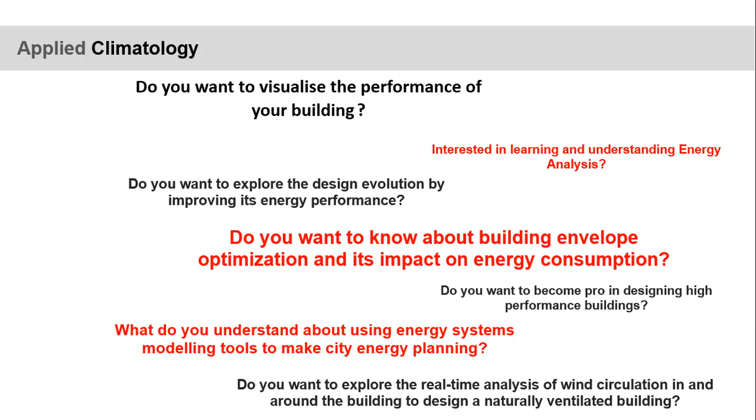So, as per my understanding, when I got an invite for this, I just wanted to understand what will be the objective of the lecture. The objective of this entire lecture is to understand the need of the industry and to upgrade yourself. It's not a theoretical lecture where we'll be talking about what is CDD, HDD, what is the azimuth angle, how the sun rotates, or from which direction we are getting the sunlight. We all know about that.

The idea is, based on your understanding of climatology, what you can do in the industry. I am an architect, from the architecture background, and I suppose most of you are from that background. It's not limited to conventional architecture these days. We are evolving more, trying to understand the design aesthetic and performance aesthetic and compare both. We are trying to catalyze our informed decision making, and to understand how the integrative design process will work. And we need to understand the market demand for all the analytical methods that design professionals are using.

So basically, the objective of this lecture is to prepare you to understand the need of the market, and to become a pro version of yourself by taking some kind of courses. At the end of the session, I might be telling you about a few of the courses and tools that we are using in the industry, that will help you develop professionally and learn and evolve more in this profession.

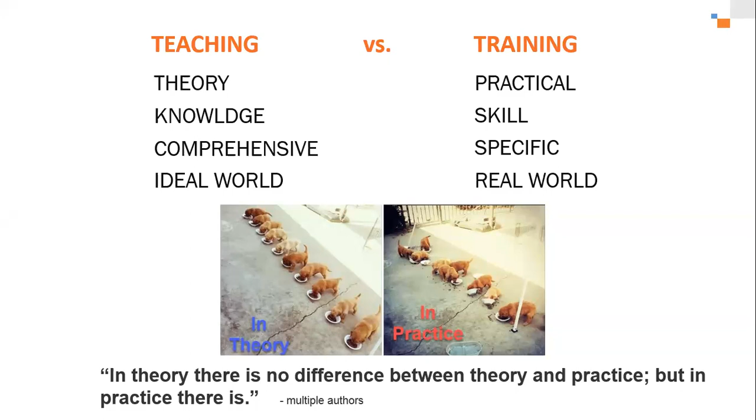When I was a student, I used to make different kinds of arrows. My teachers used to ask me how the wind flows, and I used to make colorful arrows, blue, red, cool wind, hot wind, warm wind. But in actual design it doesn't work that way. So that is the understanding that we need to gain to upgrade ourselves in this industry.

So what is our journey of upgrading ourselves? In brief, from basic, you need to develop a smart tool understanding and become a pro version of yourself. We all have smartphones, and we keep upgrading them with different versions of the operating system. If there is iOS 14, then iOS 14.1 will come, 15.1 will come, iOS 16 will come, 16.1 will come. So we need to keep upgrading ourselves based on the market need and demand.

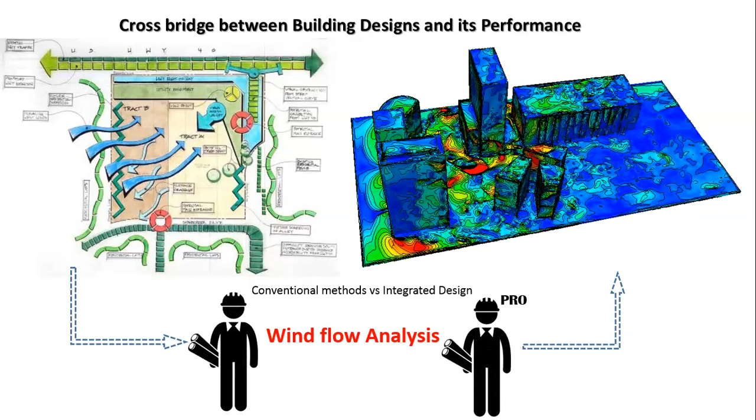of the daylighting, etc. Similarly, for the wind flow analysis, as I've said, we have designed everything with a very beautiful master plan and all, but in reality we have to quantify where we are getting the negative pressure, positive pressure, and how we are orienting our building in terms of wind direction and the intensity of the wind, and where we can get more advantage of the natural ventilation inside the building.

Heat gain analysis: as we have seen, we used to design a building in a way that, okay, the sun will be at this angle, then it will be at this angle, and this is how much sunlight we are getting. But actually, how we are going to understand how much the heat gain is, is where we need to upgrade ourselves and learn more tools to understand the impact of heat gain and to quantify it basically.

So with this, I'm going to start my session. The previous few slides were just to give you the hang of what this lecture is going to be. And now with this, I'm going to start with the understanding of today's topic.

So starting with climate change, we all know climate change is a popularly used term now, and nowadays it is impacting all the industries that I have quoted here, whether it is agriculture, forestry, fishing, healthcare, governmental services, everywhere. We all know there is climate change and it is impacting us a lot. And what is the cause of climate change? All these greenhouse gases which we are emitting in the environment, and that is causing the climate change effect.

Can anyone tell me in the chat box, maybe Nishta, if you can tell me who has given the right answer, which greenhouse gas is the major stakeholder contributing to climate change? We have so many gases here: methane, carbon dioxide, carbon monoxide, nitrogen oxide, and all. Can anyone tell me which gas is the major stakeholder contributing to climate change? Any answers?

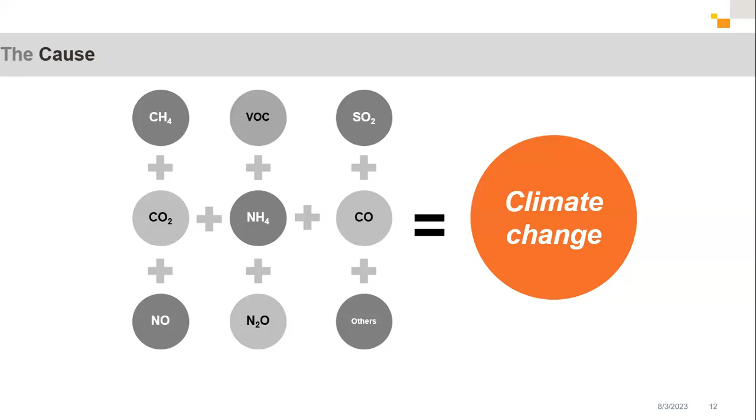Very good. Yes, CO2. So why CO2? Because out of all the greenhouse gases, CO2 is the major stakeholder because it remains for a longer time in the environment and its phase-out time is very long. So because it is there very long and is the major contributor, we need to understand how to limit our emission of carbon dioxide in the environment, not to reduce it, but to mitigate the impact of climate change.

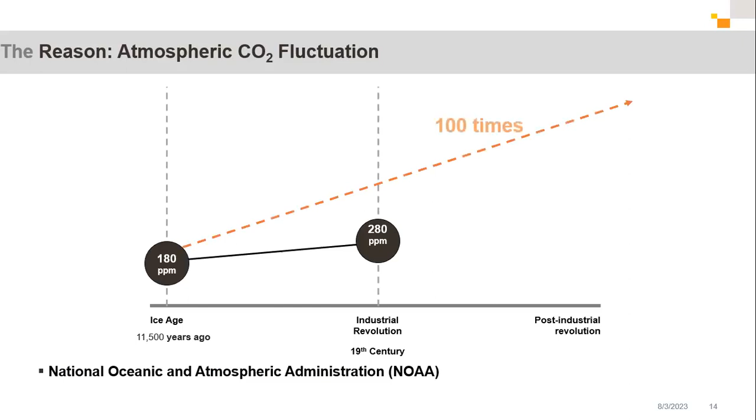So if you see how the atmospheric CO2 fluctuation was, from the ice age till the 19th century, we have the fluctuation of CO2 from 180 ppm to 280 ppm. Okay, but in the current post-industrial revolution, the fluctuation has increased so much, from 1.5 times of carbon dioxide emission to almost 100 times. The projection is like that.

So we understand why we need to mitigate the impact of CO2 and how to reduce the CO2 emission in the environment: because we are contributing a lot of emission of carbon dioxide in the environment, and that is causing a real problem for us, and it is going to cause a real problem for our future generations as well.

So what is the global warming effect? We all know this. In a very simple term, when we have the radiation coming through and it is getting reflected back, it is the normal concentration. But if it gets trapped inside the Earth's environment, then the concentration becomes high, and then it causes the warming effect.

And why does it become trapped? Because all these greenhouse gases form a layer which does not allow the radiation to dissipate back into the universe. So basically, because of that, this entire radiation is getting trapped, and we are getting higher atmospheric concentrations, which is actually warming the environment.

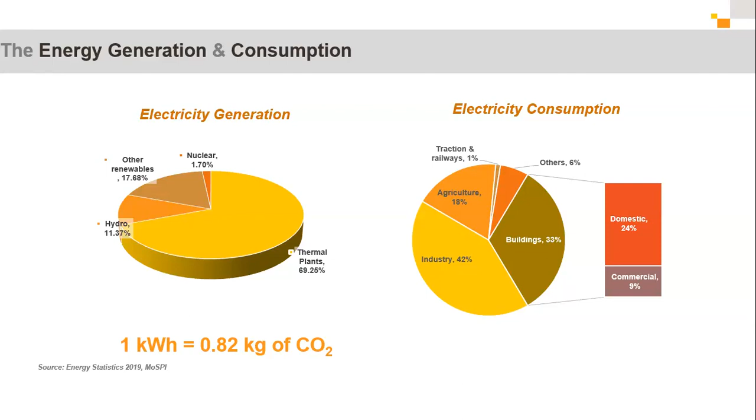So we all know that the building sector consumes more electricity, and by 2060 we are going to build twice the building stock; that is what is yet to come. And with the current rapid growth and current construction trends, if we are building and constructing inefficient or carbon intensive buildings, then it is going to be a huge problem for us in future.

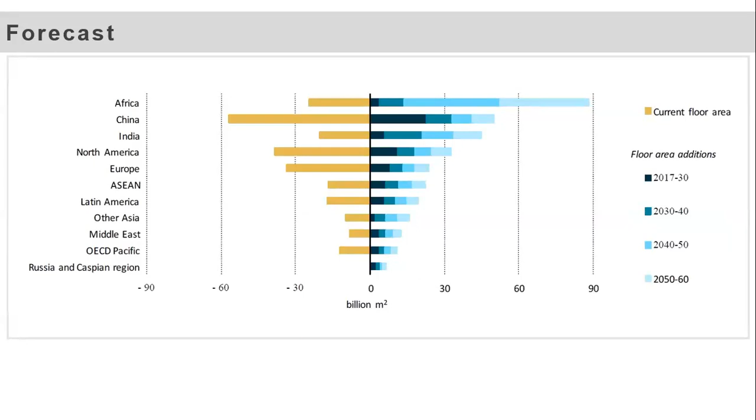So what we need to understand is, if you see India's floor area addition, in just a few more years we will be doubling the construction industry. So we need to understand where we need to pitch in, how we need to design our current and future building stock, and how to improve our existing building stock to mitigate climate change and the negative impact on the environment.

So the need of the hour is, we need to seek, improve, and alter, even disrupt. We love to design and redesign. I have quoted here, the buzzwords today are innovation and disruption, and both are considered positive. But we need to ask ourselves: if we are not going to design in a conscious way, where will we find the resources to build new housing, and where will we find the energy to maintain it? And how can we design and redesign? Responsibility should be the question we brainstorm, and what should be the guiding principles.

So from here, I want to talk about what should be the underlying principle with which we can have a conscious or climate responsive design, where we can contribute more to the industry and make informed decisions. We are not just designing for the sake of designing. We need to design anything for a purpose, to meet a need, and the design of a particular building has to provide comfort and well-being to the occupants in a new or better way. So we need to achieve a goal and make a statement.

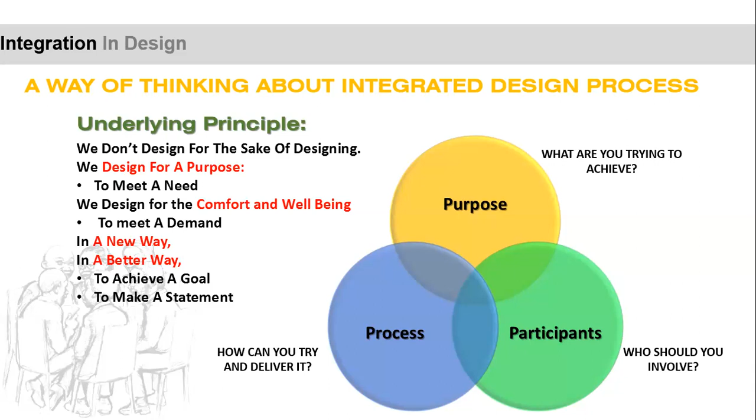We need to define the three P's in the integrated design process: purpose, participants, and process. And we need to ask ourselves: what are we trying to achieve? Who should be involved as participants or occupants, who will be the stakeholders, with whom will we be aligning, and how can we deliver it? For the process, we need to understand whether the whole construction process is efficient or not. And the way of thinking should be, if we cannot measure it, we cannot improve it.

So there's something we need to understand: how to quantify our design. If we have a good understanding of building physics and engineering sciences, then we'll be able to quantify it and do a quantitative analysis. And then we need to think creatively also, where our creative design process gets involved. So the conclusion of this background of design principles is that we have to have a mixture of science and art as an integrated design process to develop our designs and make all the design decisions. That's how we'll be able to take informed decisions for making any design.

Moving forward, as I've talked about purpose earlier, what is the purpose of the building? To provide occupant comfort, in terms of thermal comfort, air quality, visual comfort, and acoustic comfort. What are the physical processes that happen when we design a building, and what defines the comfort of the occupants? It's heat transfer, moisture transfer, light transfer, sound propagation, and so on.

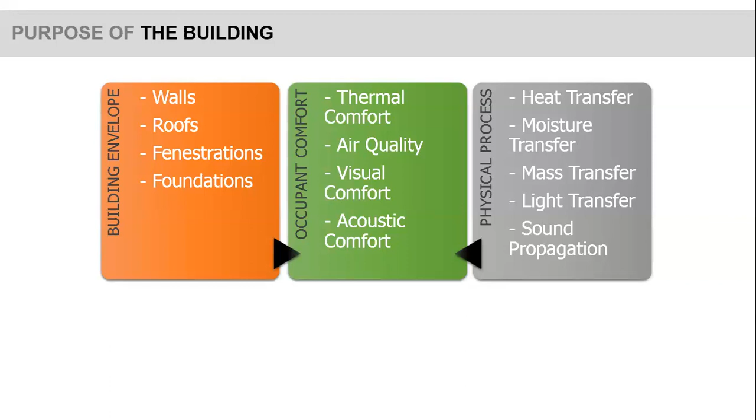We all know that thermal comfort and everything can actually be designed properly by optimizing the building envelope. When I say building envelope, we need to have a proper wall design, roof design, fenestration design, and foundation, so that we can achieve the required thermal comfort inside the building. The active systems involved to achieve thermal comfort are the HVAC system, artificial lighting, etc. Then understanding the energy consumption scenarios in the building.

Not going into much detail, I just wanted to show that we've already discussed that buildings contribute to 33% of electricity consumption. How is the distribution of energy consumption in any building? I'm taking a typical case of a commercial building.

If we see, 55% of the energy consumption goes into air conditioning, like heating and cooling the building and maintaining the proper thermal comfort requirement of the occupants. Then it takes 25% of the energy to design proper lighting, internal loads take 15%, and other loads take 5%. So we need to understand that if we're able to optimize the air conditioning and lighting loads in any particular building, it will be easy for us to reduce the electricity or energy consumption.

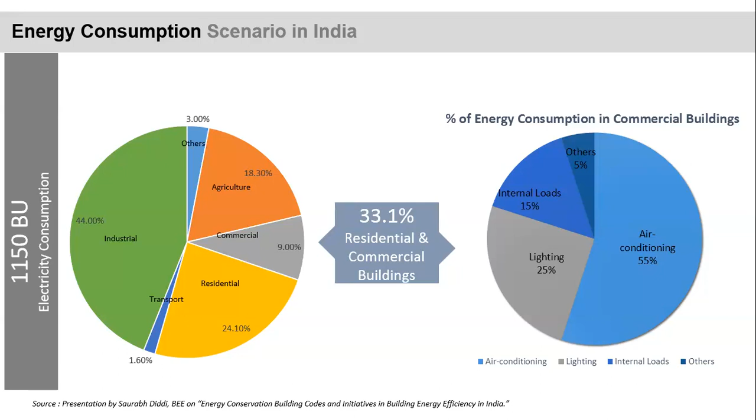This is indirectly translating into the reduction of CO2 emission in the environment.

Now, why is there a need for energy efficiency? I'll give a basic definition here. As mentioned in the Paris Agreement, we need to hold the increase in global average temperature to well below 2 degrees Celsius compared to pre-industrial levels, and pursue efforts to limit the temperature increase to 1.5 degrees Celsius above pre-industrial levels.

This is a question that comes up many times, and you might find it difficult to answer, because many people think that for building energy efficiency, you just need to install renewable sources of energy or solar panels. But that's not the case. We need to understand the process. It's not simply about switching our energy demand to renewable sources. We need to put more effort into designing and reducing the internal loads of the building, and then switching to cleaner sources of energy.

If we look at the life cycle of the building design process, these are the basic steps: preliminary design, design contract, detailed drawings, bidding process, then contract negotiation, and then the construction process.

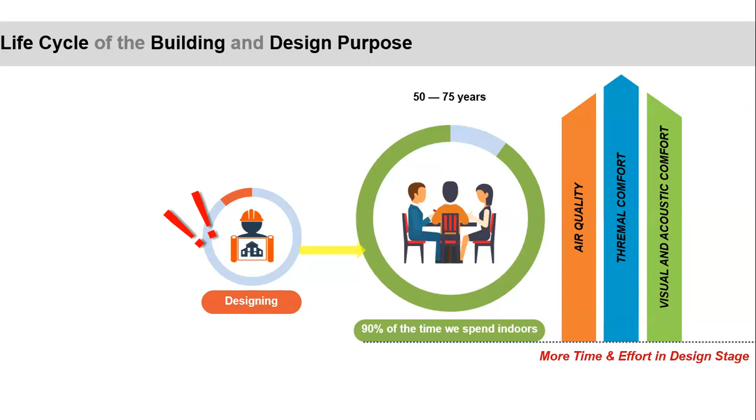We need to apply those theories here to improve these three parameters inside the building. And how will it happen?

In the initial stage, we need to understand the passive strategies, which are climate responsive in nature. We need to understand the surroundings of the building, the site-specific requirements, and what materials are available.

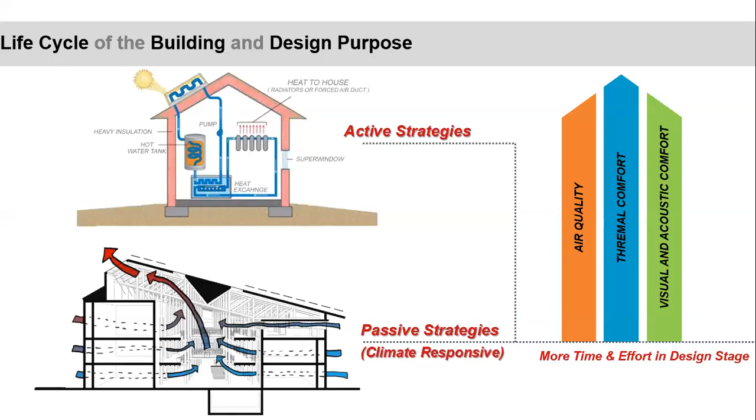After that, we need to apply the active strategies—how to make the building thermally comfortable, what mechanical and electrical systems to use, and so on. But it has to be a mixture of both, and we need to put a lot of effort into properly designing a building. Almost 50 to 55% of the time we need to spend, with an integrated process, to come up with the right design for the right situation or the specific requirement.

So the moral of this discussion is that during the design and construction stage, we put in human and material resources, which is called the capex, and then during the operation phase, we consume electricity.

If we optimize the human and material resources during the design and construction phase, the capex will increase, and the opex will be reduced. So that is the whole understanding—to balance the capex and the operational expenses properly.

Now, coming back to the previous question that everyone would have asked you: 'Just install the solar panel, then your building will be energy efficient or something like that.' But do you think that's the right process? I don't think so, because first we need to avoid the wastage.

If I try to reduce this entire pyramid into 3 steps: first we need to understand how to avoid wastage of resources and energy consumption. Then we need to save energy through efficient usage of fixtures or appliances, or through building design parameters. Then we need to shift to renewable sources of energy, because the more we move upward in the pyramid, the complexity and investment of the parameters increases.

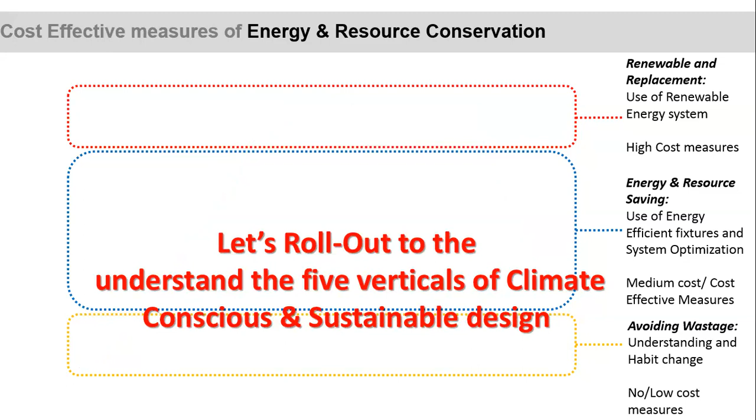So now, based on this, let's roll out to understand what are the main 5 verticals of climate conscious design, because we have understood the background of climate change, what is the need and where we are supposed to apply it. Now let's see what are the 5 design verticals to attain these design parameters.

This has to be at the conceptual design stage when the project is getting launched. The idea has to be seeded there, aligning all stakeholders relevant to the industry to add project value and credibility, and to address the global causes that will improve the sustainability of the building and help us design world changing buildings.

So the first vertical is learning from nature as systems. We all know about biomimicry designs, bioclimatic designs and all, but what exactly is it? It is learning from nature.

You might have seen that nature does nothing uselessly. And I have put another quote here: humans will never devise an invention more beautiful, more simple and more direct than nature does, because in her inventions nothing is lacking and nothing is superfluous.

When I say nothing is lacking and nothing is superfluous, what do I mean? With nature, and by understanding nature, we have understood the word called optimization. Optimization is neither lacking anything nor the superfluous use of anything, but the right amount and the right consumption. That's the word optimization, which we should learn from nature.

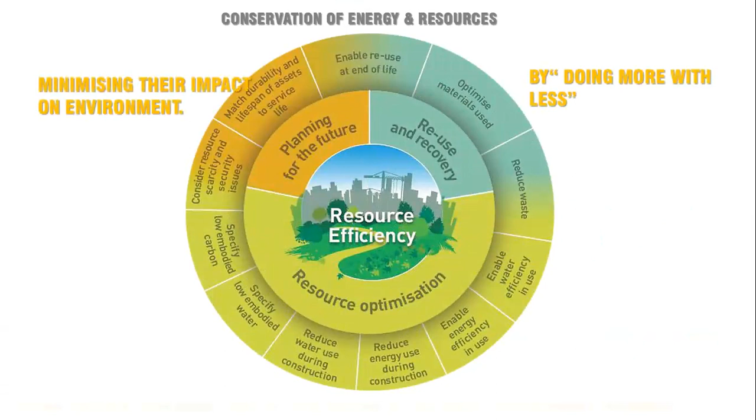So the three parameters of resource efficiency are: we need to plan for the future, minimizing the impact on environment; we need to reuse and recover by doing more with less; and then we are supposed to optimize the use of energy, material, waste, and water in the most sustainable manner.

Once you understand everything, once your principles and ideologies are clear in your mind, then you jump into the design process - how to make an integrated building design. What will be an integrated design approach, combining all your understanding and applying it at the various stages of design, and all these principles will help you make informed decisions, which is what is required.

Many times we design something in a flow of thoughts that comes during the design of any particular building, because we are all architects and we cannot restrict the design ideas coming into our mind. But we need to understand whether these ideas are leading towards the right direction, and that is where you need to take informed decisions based on how energy efficient and climate conscious your strategies are.

Choosing suitable materials as per the site specific requirement, decreasing dependency on non-renewable sources by orienting or designing a building in a way that gives proper lighting and proper thermal comfort inside the building, conserving and recycling the resources used inside the building.

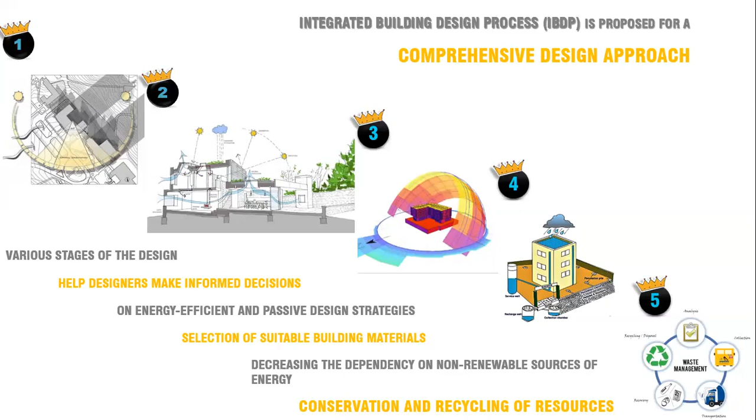So here I would like to tell you these are the different analyses that you can do on your design to understand the climate consciousness of it. At the site level, you can do the site analysis where you can understand the site topography.

You can do shadow analysis. You can understand the natural water resources. Then you can design to mitigate the urban heat island impact by doing the urban heat island assessment, by doing outdoor wind CFD models, which will help you in the wind flow directions and all.

At the climate analysis level, you can understand the sun path. You can do the sun path analysis, wind flow analysis inside the building, form and massing analysis of the building. Whether the design of the massing of the building will be compact, or we need to make it in a different staggered way. So you have to do these kind of analysis when you're designing the building. You need to also integrate the passive design features at the design stage itself.

Then coming to the building analysis level, you can do indoor CFD modeling, building envelope optimization, daylighting simulation, artificial lighting simulations, thermal comfort analysis, box modeling simulation, innovation designs, material consultation, etc. And then at the water assessment, you can do rainwater calculation, stormwater harvesting, recycling and reuse of water. And then for the waste management, you can understand the solid waste management and zero waste building design model.

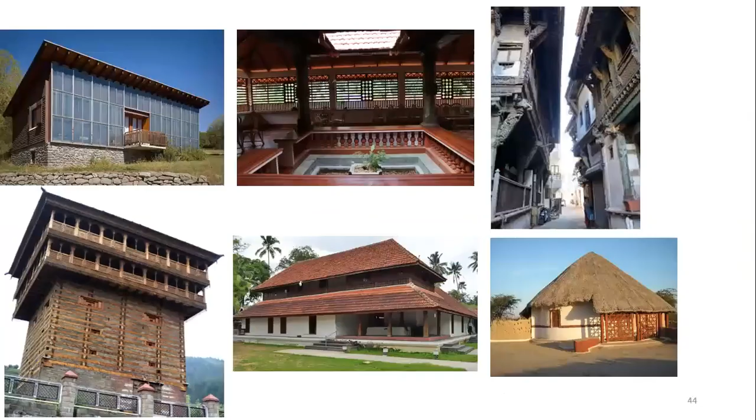Coming to the third vertical, we need to show respect for the place and people. And why I'm saying this, we need to understand the different typology of the houses. As you see here, in earlier days we used to make different types of designs. Like in cold climate, we have different design styles. In warm and humid climate, we have a different housing typology. In the composite climate, we have a different housing typology. In hot and dry climate, we have a different housing typology. But why did we used to do that?

Because we were earlier respecting our climate, we were giving more focus to the local environment, understanding the place and the culture of it. So if you see these examples, we are not building some different type of building in a cold climate where it is not required. So if you see all these kind of housing typologies that we used to build, which are actually required for the place-specific requirement, we as architects, currently what are we doing?

If you see buildings in Mumbai, if you see buildings in Gurgaon, both the cities have different climatic conditions, but they're having similar types of building designs. Do you think this is the right approach to design? No, because then what we are doing is creating a problem, and then trying to find a solution: okay, why is my building not performing well? Why is my electricity bill so high? Why am I so thermally uncomfortable inside the building? So this is the problem that we have created, and then we are trying to find a solution for it.

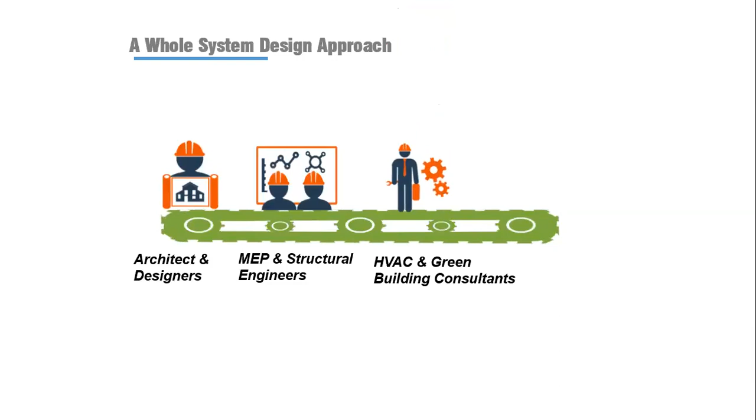We need to have a whole system design approach with an integrative design process. At the initial stage itself, we should have a design charrette, and at the concept design and schematic design stage, everything needs to be fixed, everything needs to be finalized. All the stakeholders should be aligned together. They should be sitting together and telling us, okay, these are the design requirements.

And if you remember the life cycle of the building slide that I've shown earlier, only then are we going to increase the 30% of time that we were spending earlier on the design stage to almost 50 to 60%, and will be able to improve the design performance, or the resource performance of the building. So design charrette is an important term that you might hear a lot in future, where all the stakeholders involved in the building design are together, sharing to understand the concept design and to finalize the concept design and schematic design of the building.

So now let me show you the energy efficiency canvas of the building. If you see, we have different aspects. We have policy for achieving building energy efficiency. And why am I talking about building energy efficiency? Because, as I've explained earlier, energy plays a major role. Consumption of energy results in a lot of carbon dioxide emission into the environment. So we need to focus more on mitigating that.

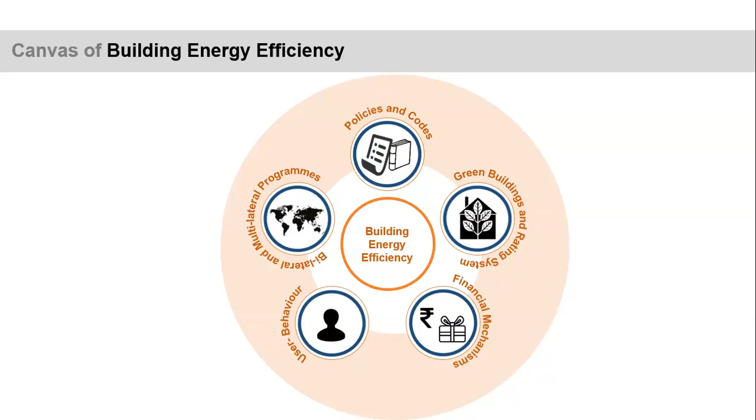So there are different policies and guidelines that the government has developed for building energy efficiency, like different policies and codes in place. We have green building and rating system guidelines in place. We have different financial mechanisms in place. We have user behavior for demand side management and demand response in place. And then we have bilateral and multilateral programs to achieve building energy efficiency.

So our first approach is, suppose we double the system efficiency. For example, the design is in place; let's double the efficiency of whatever systems we have applied, let's say HVAC systems or electrical systems. Let's put more efficient systems in place. It will definitely reduce the energy consumption, but it will also increase the system cost, because more efficient systems obviously come with some cost, right? But it is going to reduce the energy consumption, let's say by half for now.

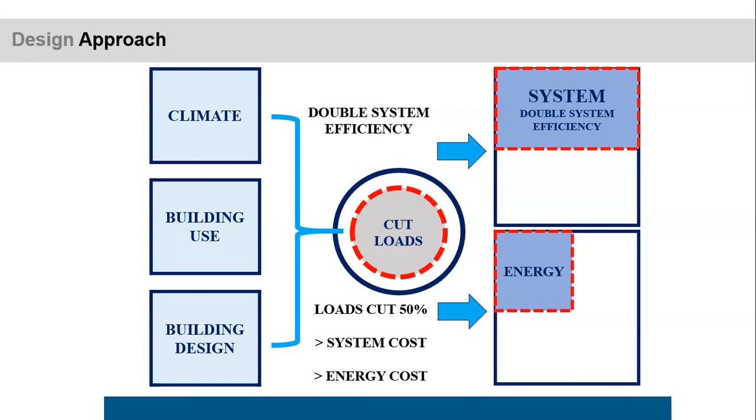Okay, so to summarize it all, we need to put more effort into the design strategies, and that will result in almost 50% of the energy reduction. Then you need to put in energy efficiency technologies, which will further reduce the fuel consumption, taking the energy reduction from 50% to 80-85%, and then use different renewable sources of energy. Then what will happen? I'm asking this question again, what will happen?

So if people tell you that making an energy efficient building is a very simple process, simply add renewable sources of energy, then you can explain to them that it is not directly switching to clean energy sources. The more cost effective and conscious approach to make a building energy efficient is to design the building in such a way to reduce the internal loads. Then you should apply energy efficient technologies, and then to offset the remaining demand of the building, you can use cleaner sources of energy. That will be a more efficient and cost effective approach for making a high performance building design.

Is that clear? Does anybody have any doubt till here? Shall I move ahead? Nishta, just make sure nobody's sleeping. Okay, so I am moving ahead. Yes, ma'am. People are actually replying in the chat box. Okay, great. Some are hearing, at least we can say. Great. Okay.

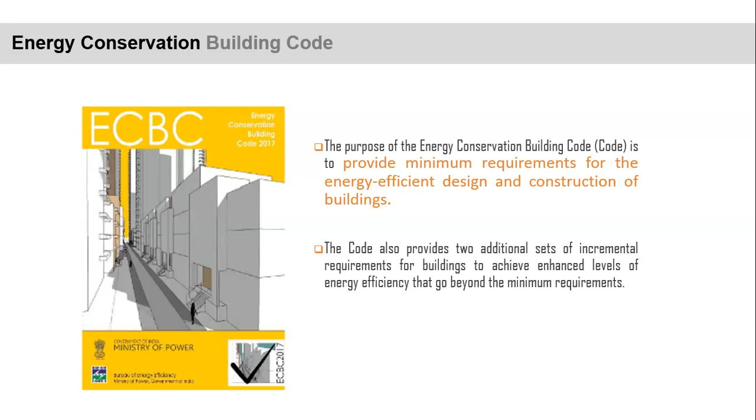And if you look at the governance system, the central government has the role of developing all these codes. The state government has the role to amend the code to meet state specific requirements, notify it in the state gazette, and revise the development control rules, model building bylaws, etc. And the local government helps enforce it at the grassroots level, like revising the urban local building bylaws and the building approval process, enforcement of ECBC, etc.

So now as an architect, once we start developing or upgrading ourselves, we play a bigger role in the industry. Once we have all this understanding of the climatology that we study, how to make energy efficient buildings, how to apply climatology to develop sustainable building design, we can actually help the system, or we can also support government to implement all these things. And we can also support capacity building of all the stakeholders in the industry, the designers in the industries, to help support the implementation of energy efficiency in the system.

So as I've shown you the code, the Energy Conservation Building Code has 4 major components. The building envelope: the code specifies the requirements for optimizing the building envelope. What will be the U value of the building assembly, the wall assembly that we are using, the roof assembly that we are using, and the fenestration, what will be the specification of fenestration that we are using in the building envelope.

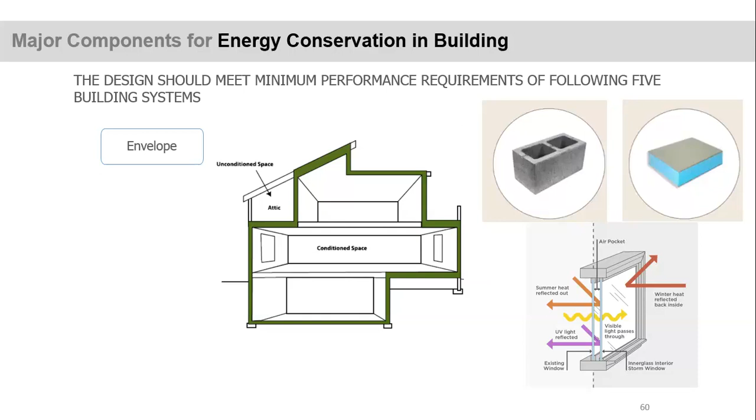Then the lighting and control system, what are the actual specifications of lighting and control systems that we are using to meet the energy efficiency performance of the building, comfort systems and controls that we should be using. And the fourth component is the electrical and renewable system, what kind of system should be in place to meet the energy conservation requirement of the building code.

And if you see the applicability of it, there are certain mandatory requirements that we need to follow. And then for the compliance approaches, we have different methods. In the code, there is a prescriptive method which specifies each and every requirement of the U value of roof, wall, fenestration, what will be the SHGC coefficient, and all these components. And we need to meet all those requirements to comply with the Energy Conservation Building Code.

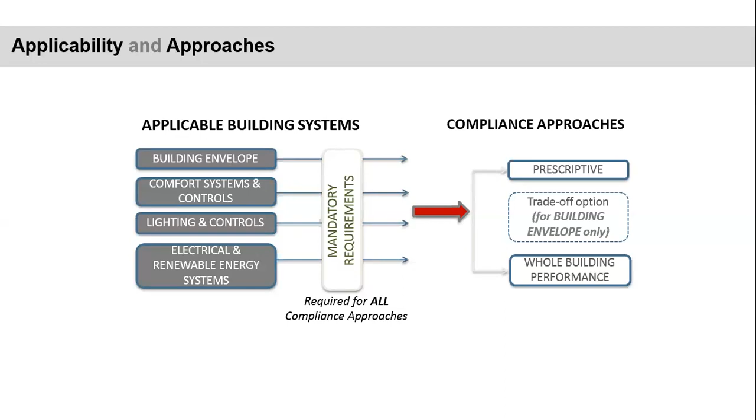On the other hand, there is a second approach, the whole building performance method, where you can do simulations. We can do energy simulation, and we can actually calculate the energy performance index of the building. And we will see whether the EPI that we have received from the simulation is actually complying with the Energy Conservation Building Code requirement to make the building ECBC compliant. And if you see the overall impact of energy efficiency in the building, so this I have not.

Sorry, hello, is someone saying anything? Okay.

So moving ahead, this is just an example that I have taken from a few of the projects that we have done, how by complying with the ECBC code and with different incremental levels of ECBC code. I'm sure you might be knowing this, that for ECBC you have three different incremental levels. The first level is ECBC compliance, then ECBC Plus compliance, and then Super ECBC compliance, to save more energy by growing more stringent or aggressive in our approaches to implement the energy efficiency measures. And this is how it contributes.

It can actually reduce your energy consumption demand by 25% to 45% of the electricity or energy consumption demand. So these are a few of the cases that I have done in my previous engagements with different companies. When I was working with ECBC Cell, we had to do some demonstration projects. So I've put together a few examples to show you.

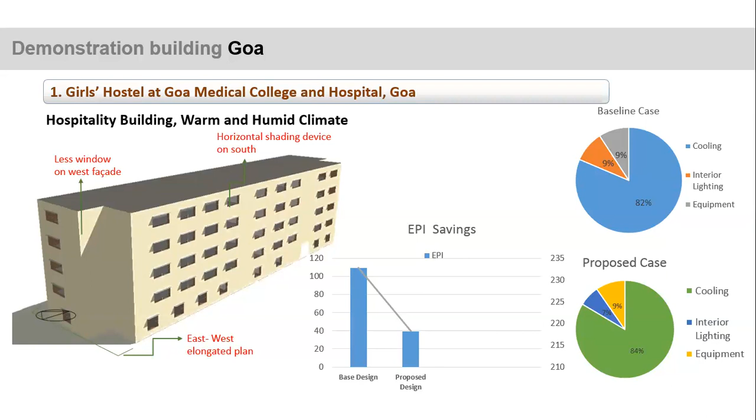So this is another case study that I have put together from my desk research. It is an IIT Kanpur building, where, if you see this indicator figure, the initial energy consumption was approximately 240 kilowatt-hours per meter square per year. And by implementing all these energy efficiency measures, by optimizing the envelope, it is reducing 13% of the energy consumption. All the measures and interventions are mentioned here.

You can just go through it, but I'm trying to give you the summarized version of this whole analysis. By envelope optimization, by making the envelope efficient so that we can reduce the heat ingress inside the building, we have reduced 13% of energy consumption. By lighting optimization, we have further reduced the energy consumption to 19%. So see here, in green, you can see how the EPI is changing. The lesser the EPI, the better the building is performing.

So earlier, if you see, I have mentioned 240 kilowatt-hour per meter square year. After building envelope optimization, it has reduced to 208. With lighting optimization, it has reduced to 168, which is almost 19% of energy saving. Then HVAC optimization will contribute to 26% of energy saving, which is like 133 EPI. And then using controls and all, you can further reduce down the EPI to 98.

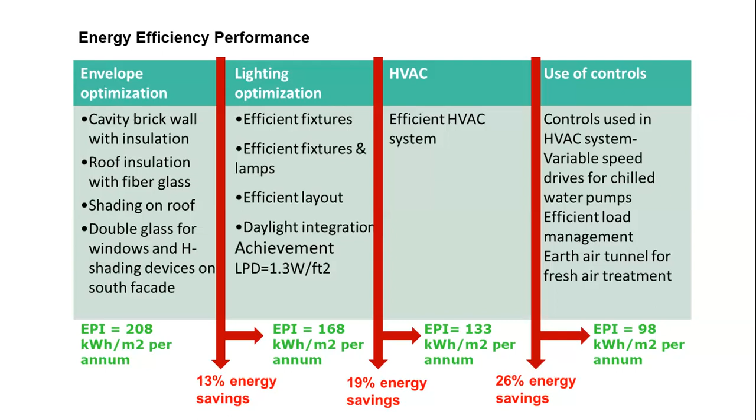And what is the impact of energy efficiency in the market? We have to set minimum standards, and we need to push the market by doing different R&Ds, incentives, rating systems. We are going to pull the market, and then we have to actually establish the market to incorporate more energy efficiency measures in the industry.

I'm just giving you a simple example: earlier when we used to buy an LED bulb, it was very costly, but now we are getting it at a very cheap price. So this is how the market pushes itself. If you create the demand, if you actually start making buildings that way, you are going to pull the market and set it for more energy efficient products. So this is where we as architects or design professionals have the responsibility to promote energy efficiency in the market.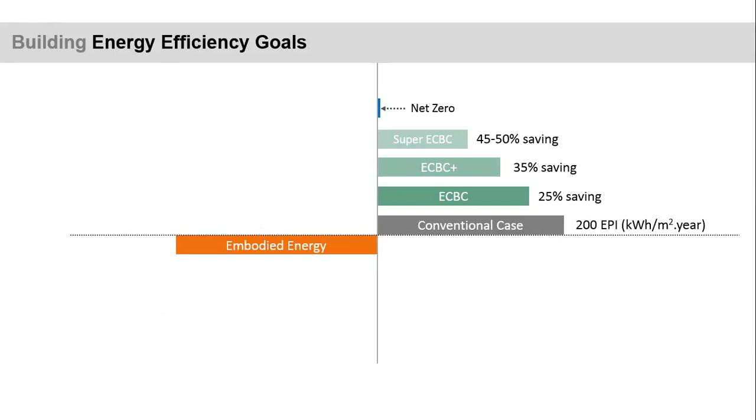So to summarize it all, the building energy efficiency goal is, for example, there's a conventional case with a certain energy consumption. We need to put more focus on embodied energy analysis also for the building materials and the building design that we're doing. Then we need to put together our different approaches, whether we'll be going with 35% energy saving with ECBC Plus, then Super ECBC, which can contribute 45 to 50% of energy saving, or you can go towards the net zero approach by further reducing the demand of electricity and offsetting it through renewable sources.

And with your design decisions, you can also make the building net positive. Over the years, net positive buildings can become carbon neutral. So we need to put our effort in the right direction so that we can achieve all these energy efficiency goals. We also have the national and international commitments that we have made to reduce the energy consumption and go carbon neutral in the near future. So we need to make our efforts in the right direction.

So the fifth vertical is adding knowledge and capacity building. Here, if you see, we all have knowledge. We have a set of understanding, but we need to actually try to use that knowledge by doing capacity building, by doing more awareness. You have to add more knowledge, market push, etc.

So there are all these workshops you can do, all these topics you can understand to improve your knowledge in terms of building physics, energy efficiency in buildings and analysis, energy simulation, daylighting simulation, CFD simulation. Then you can also understand the amalgamation of environment impacting features, how you can actually do the environmental impact assessment, what are the best practices in architecture and construction, MEP, etc., and how to calculate water efficiency.

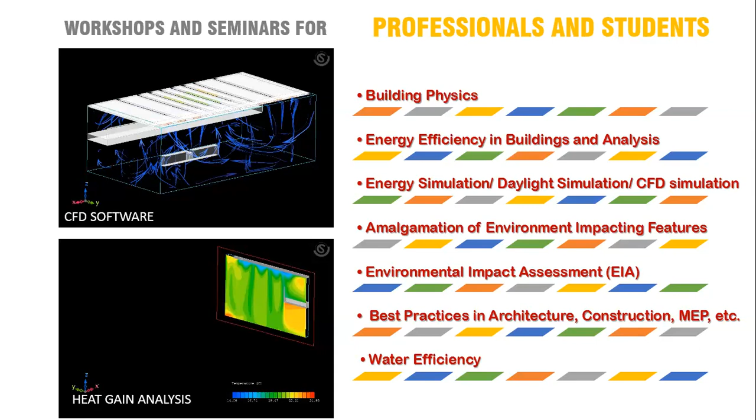First we need to understand how our building is performing, how wind circulation is happening inside the building, how heat gain analysis is happening, how heat gain occurs inside the building. We are supposed to learn and do all these kinds of analysis so as to upgrade ourselves and become, as I said earlier, the pro version of ourselves.

Until you do all these kinds of design decision-making, your design is not going to improve. We need to put together all our understanding to select the right and specific intervention for any building design, or at the urban level design — what will be the impact of climate on the building, the impact of orientation, and the impact of sun direction on the building.

We need to do all this analysis at the design stage itself, when you're designing something. Just after your architectural designs are freezed, you can start doing all these decision matrices on your own, if you apply your climatology knowledge in your building design.

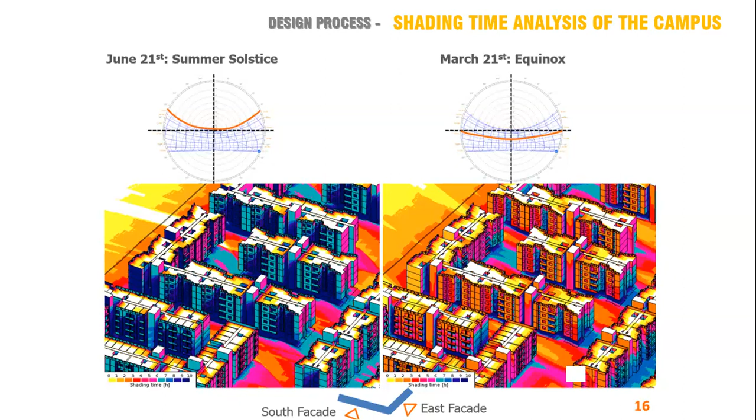Moving ahead, we have also done mutual shading analysis for our design, which you can also perform once you understand — just by placing building clusters, how to place the buildings together so that they have an impact of mutual shading.

If you just see, this was a simple understanding: a building without shading compared to a building with a mutually shaded environment can actually contribute to a 35% reduction in solar radiation exposure, and it will contribute to EPI reduction.

We need to understand how to quantify the impact of mutual shading, how shading impacts the design and massing, and what the impact of shading is inside the building, so we can understand how to orient our building and how to locate or place it at the site. This is all important to understand how we are going to do these different kinds of analysis.

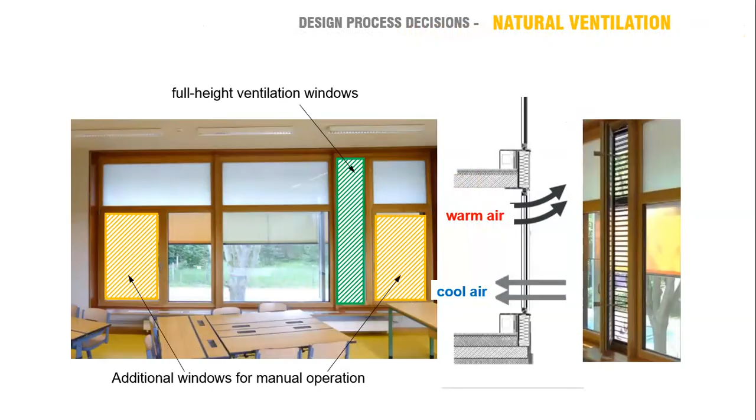For natural ventilation, we all know we have to put in a lot of windows, but we need to understand the principle behind it - how the cool air will come in, how the warm air will exhaust out. We need to design our windows so we understand the whole mechanism of airflow inside the building, and how to exhaust the warm air trapped inside. So what will be the process and how to apply it needs to be understood for natural ventilation. These are a few case studies I've put together.

You can minimize the construction - as I've mentioned earlier, you should understand the unnecessary use of components, the superfluous nature of it. You need to understand how to optimize the construction, how to use less resources, less material, and how to use less material to make a structural design look beautiful without adding any additional feature and additional cost to it.

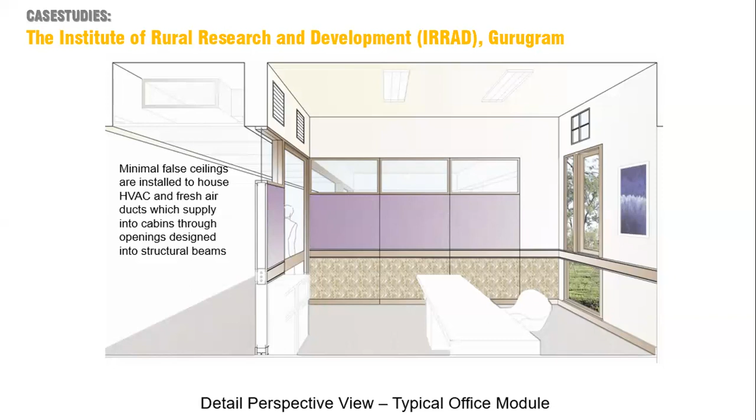You can see how the ventilation system and the false ceilings are minimized by installing space to house the HVAC and the fresh air ducts inside it, with no additional components, which in turn results in reduction in the usage of more materials and structural requirement.

See, this particular building - why I'm trying to show all these examples is, we are not trying to do some rocket science here. It is our simple understanding, and our design process has to be such that we can use our design to make it more efficient, more responsive towards the climate.

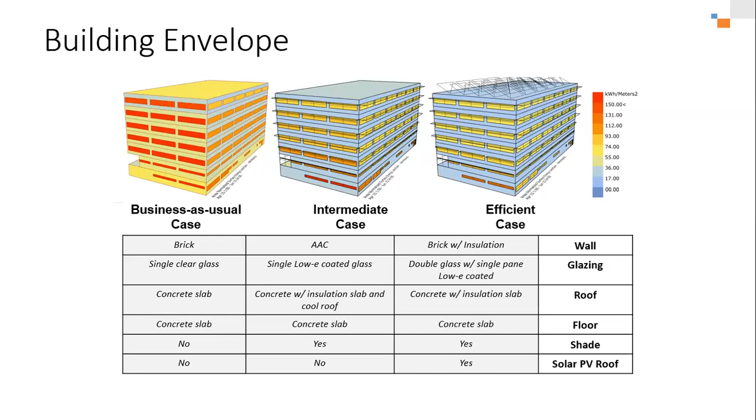So here is the legend that shows how building performance improves with efficient design cases. If you look at building envelope for daylighting analysis, it shows how to design your WWR, what the size of windows should be, which direction you're orienting it, and what impact happens at different floor levels.

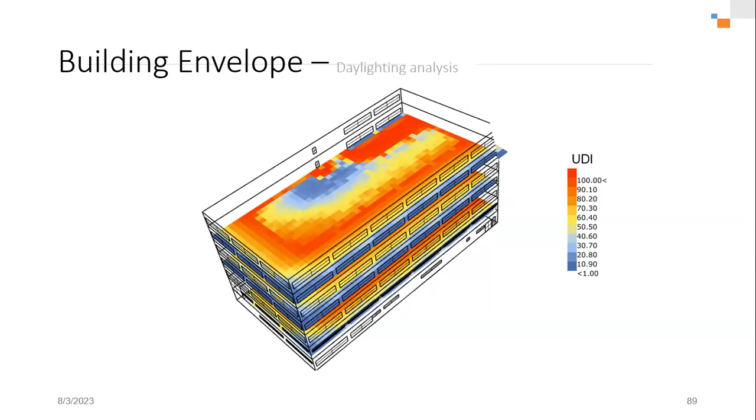We can do all these kinds of analysis if we know the right software and have the right understanding. We need to upgrade ourselves to understand different kinds of impact. By doing this analysis, you can quantify how much daylighting you're getting at the first floor, third floor, or eighth floor. We can do all these kinds of assessments.

Then artificial lighting control - just run this. Okay, so this video is not running, but yeah, it started. So what will be the impact of artificial lighting, how to design the controls, and all this we can do with different software.

I'll list this at the end of the presentation - how daylighting sensors can be installed, how they assess motion, and how infrared sensors can be installed to understand motion. If someone is sitting there, the lights will be on; if you're not there, there will be no light.

So all these kinds of analysis and assessment we can do at the design stage to understand how our building will be performing, so that we don't superfluously use artificial lighting, and it can also help reduce dependence on the mechanical system.

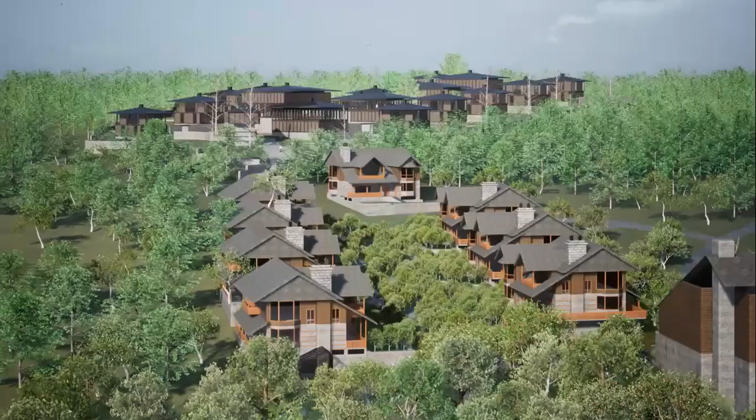Then we did solar radiation and sun path analysis to understand sunlight hours - how much sunlight we're getting, how much heat gain will happen in each building, and what the impact of mutual shading will be. After all this analysis, we came up with a design that would be the best, optimizing resources, energy efficient, and thermally comfortable.

Then there was another project - with Matra Architects for Sant Niwas, New Delhi. Considering the extreme conditions - there was some sound in the background - this was another project where we used different strategies.

There was this project called Sant Niwas, where we had to look into different strategies for the vaults, because they don't need any disturbances from fans, coolers, or air conditioning, since they need to meditate.

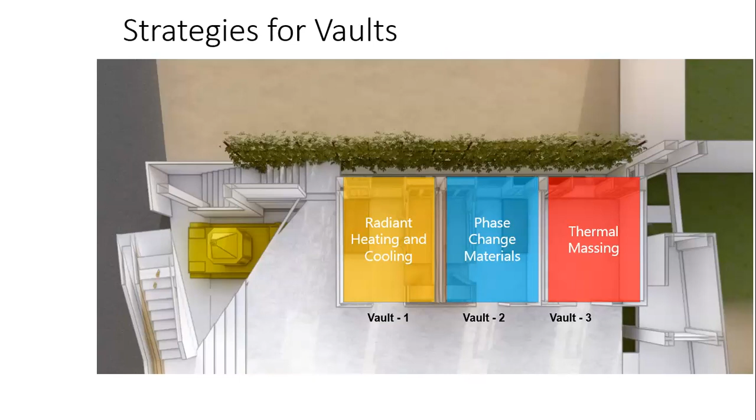There were three different vaults where we identified different strategies: radiant heating and cooling, phase change materials, and thermal massing. For different vaults, we analyzed how radiant cooling would perform, and from where - at the back side of the wall or at the roof side - we needed to apply it. We analyzed different locations.

Then for the second vault, there were phase change materials - these are actually salts. We applied the phase change materials on the roof, on the floor, on the wall, and then on the roof again.

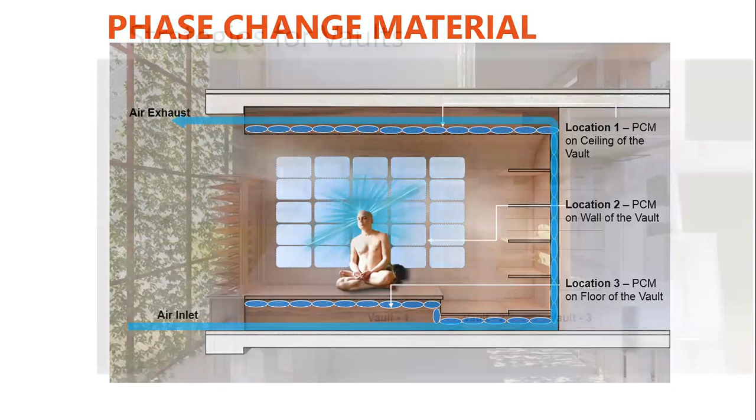There would be an air inlet to recharge these phase change materials, so once charged, they can dissipate coolness inside the vault, making it thermally comfortable. These are actually revolutionary materials available in the market now. It's all about understanding what materials are available, what's trending in the market, so you can understand the impact of these materials when you apply them in design.

Then in the third vault, we have tried to analyze the thermal massing performance by actually introducing the thermal mass with low emissive paint, and then how will it perform. So all three vaults, we have tried to analyze different types of strategies to make it thermally comfortable without having any disturbances, because we need to have the right amount of thermal comfort inside these vaults, not so cold, not very hot. And these are the strategies that we have explored for the proposed vaults.

So different kinds of radiant cooling, space allocation, modular chillers, and all. So where to locate it, how to design it. The floors were with radiant piping routing at the basement floor and the upper floor. So these were the designs, the interventions that we have proposed to make the building more thermally comfortable, while keeping in mind that it is energy efficient in nature as well.

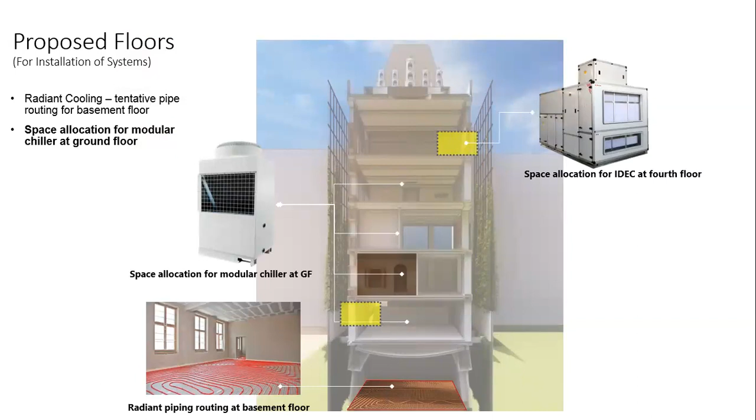So in the end, I just would like to tell you that it is not just practice. We all need to practice design, not decoration. Our sole responsibility is to design each and every element so consciously that we understand that we are not overdoing it. And we also have to understand that we are not designing any building just for the sake of designing. As I've mentioned earlier, it has to have some purpose. So this is the tip of the whole session.

And now I think this particular session is over, but I would just like to have an interactive round to understand the principles, and to have an interaction for understanding the concepts and fun facts of climate responsive architecture. So can I ask some questions? Not questions exactly, can I ask any of you to just answer what exactly this is and how it performs?

What is this strategy that I am flashing on my screen? Can anyone tell me what the system is? Participants, if you want, you can unmute yourselves and speak, or if you're not comfortable speaking, you can also write your answers in the chat. It's a very simple question, a very simple technology to start with. Anyone can unmute and answer. What is this technology that I'm flashing here?

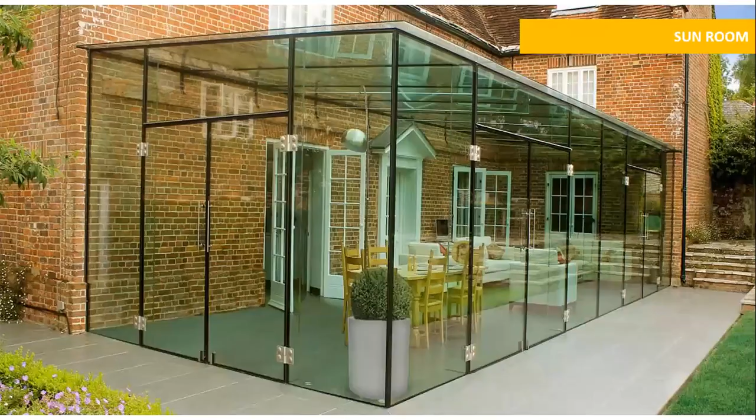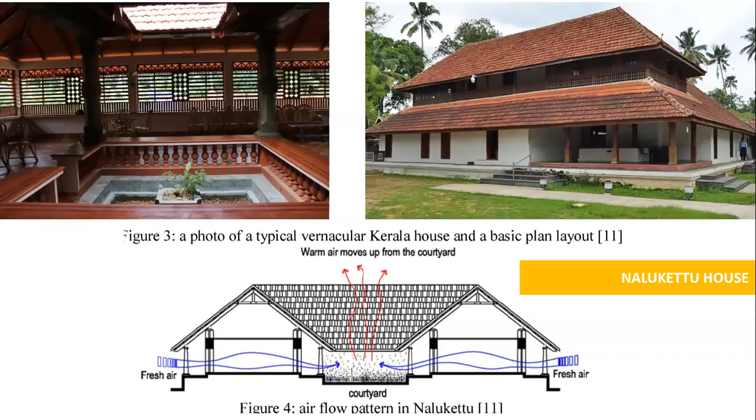What are these? Anyone can tell me? I'm sure someone might have done their research, I mean, there are 37 participants.

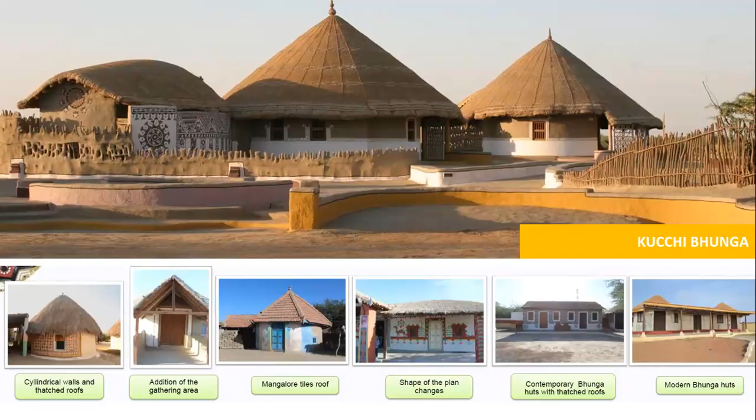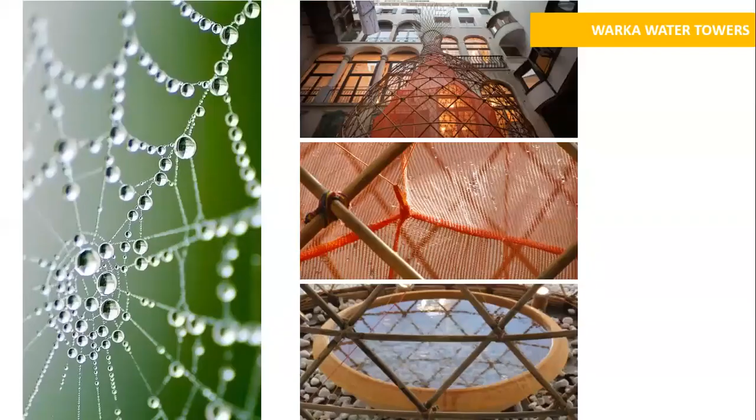This is actually a bamboo tower which creates 25 gallons of drinking water per day from thin air. On the left hand side, this is actually a spider web. With this principle, the spider web traps the moisture from the environment, and you might have seen droplets accumulate on the spider web. A similar principle they have applied in this tower.

They have a very fine mesh on this tower, and because of the moisture and water droplets present in the air, it gets trapped in the mesh, and then they collect it below in a bowl. With this, they're trying to mitigate the water scarcity in that area. These are called Warka water towers, which you can read more about to understand how to use and reuse the resources available at site. So with this, I'm going to end the session.

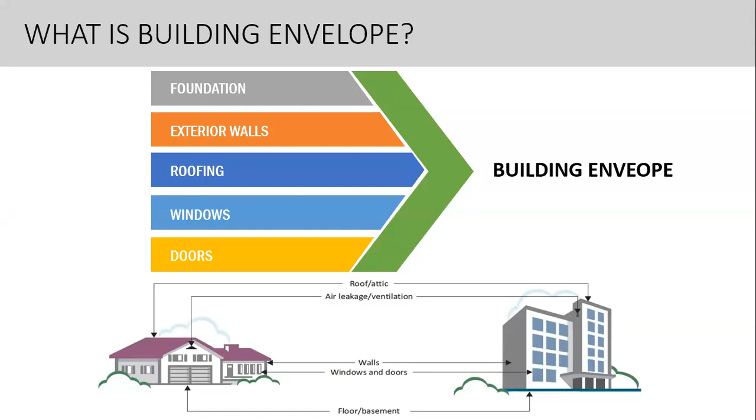Yeah. So what is a building envelope? As I've discussed earlier, building envelope comprises foundation, exterior walls, roofing, windows, and doors. And as we have discussed earlier, the heat gain through the building envelope happens through conduction, convection, and radiation. The major role of the building envelope is to give us a protective environment. It separates the indoor environment from the outdoor environment, and it also helps in giving us thermally comfortable spaces inside the building.

So what is the approach for a high performance building envelope? A building envelope has to be sustainable in nature. Its safety is very important. Its historic preservation attribute is very important. Its functional aspect is very important. Its cost effectiveness is very important, and its aesthetics are also very important. So if a building envelope has all these 6 features together, then we can say this is the right approach to designing a high performance building envelope. So what is the road towards energy efficient building envelope design?

So if you see the old stock, not the traditional or vernacular architecture, but where we have designed without giving thought to how to design a building - an inefficient stock of building envelope. If I quote a few examples, with single pane windows, they have air leakages, they have no insulation, which contributes to more heat ingress inside the building.

With a typical building code, to at least achieve the minimum specification of building envelope requirement, you will apply low-E double glazed windows, with low air leakages, or high insulation. But for higher efficiency, you need to be more stringent or aggressive in your building envelope design, using highly insulated windows, optimized design and orientation with good material composition. This has to be the approach.

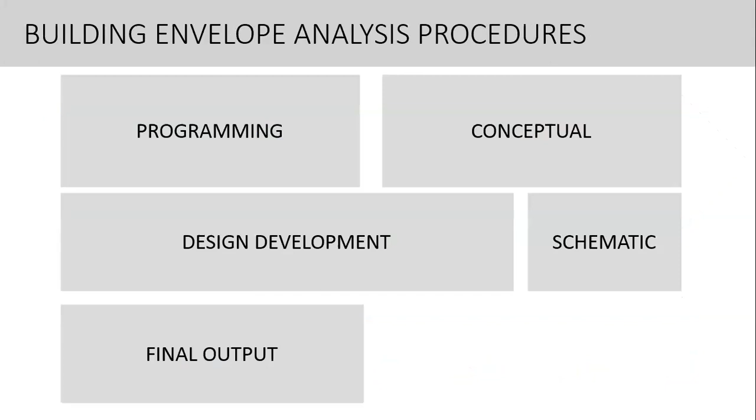For a building envelope analysis procedure, we have different stages like programming, conceptual designing, design development, schematic, and final output. You can do daylight and insolation study - then you can try and understand the building orientation.

Then you understand the facade insolation analysis, shadow analysis, etc. Then you conduct a daylight study for the building envelope, propose facade design options, and do a daylight study for a facade option. Then for that particular facade, you do a thermal analysis and finalize the facade design. Once the design is finalized, you have the building envelope optimization study in hand, and based on that you can finalize the building envelope design and materials.

So it is very important that you get all the process right. It has to be in a way where you understand from where you need to start and where you need to end the process.

For energy efficiency through building envelope, you can use different simulation techniques to optimize the orientation, envelope, and building massing, with high R value insulation in the walls and roof. You can implement low U value materials for wall and roof components, incorporate insulated glass units with low SHGC values, and have optimal fenestration and window wall ratio for a building envelope design.

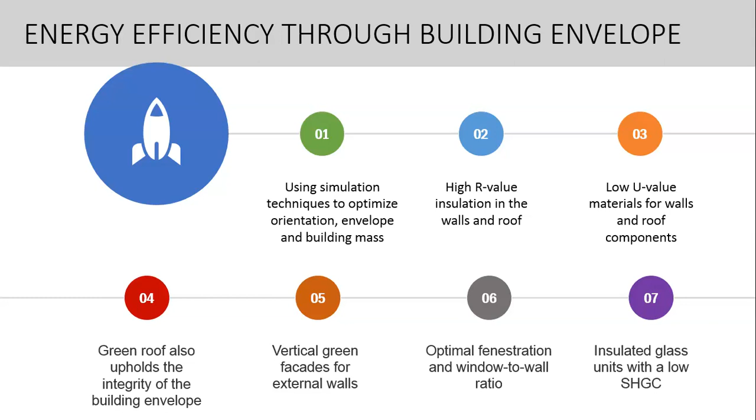You can have vertical facades, green facades or external walls to create green roofs or vertical green facades for vertical gardens in the building. A green roof also upholds the integrity of the building envelope. You can use all these principles or ideologies to develop a highly efficient building envelope.

If you have to select materials for this, as discussed earlier, there are phase change materials, insulated concrete forms for use as insulation, and metal insulated panels. Then you have different building material envelopes, which we'll be talking about in the slides ahead. With different material choices, you can mix and match to make the best wall assembly or roof assembly possible, which will allow very little heat ingress inside the building.

So if I have to just look into the overview of what are the strategies that we need to follow. First is optimization of building shape and envelope with efficient solar design, external movable blinds to control heat gains, and compact building shape for reduced heating demand. You need to optimize the building envelope by understanding how the building blocks are getting shaded, if there are any thermal bridges, and if the construction is airtight and properly insulated.

Then minimization of embodied energy. Earlier I showed that you can use embodied energy calculation to help improve the efficiency of the building. So embodied energy of the building materials of an energy efficient building can be of the same scale as the energy of the building operation. So there has to be an equal balance between the operation of the building and the embodied energy of the building materials, which can be reduced by reduction of mass.

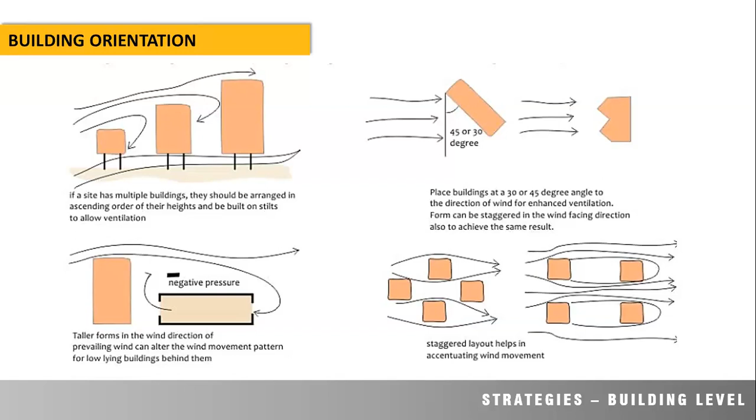As we have discussed, building orientation can play a major role, and these are the different strategies. These are some case studies which we all know, but we need to apply them in the building. For example, we all know building orientation is very important — orienting the building with respect to the prevailing wind direction, and composing the building blocks in such a way that we can invite more wind, creating pressure differences so air flows inside — and how this textbook knowledge gets translated into the actual site.

So here I have tried to show this, that if there is a building cluster, how the sun path analysis would be, how the buildings will be shaded, what will be the impact of mutual shading, how many hours of sun each and every building will be getting, how to orient the building in the prevailing wind direction. So these kind of analysis you can do from your understanding of building orientation and blocking and marking. Suppose again, building orientation, this is how you design taller or shorter trees to block the cool air or to invite daylighting.

Then you can also design how to orient your building to get the maximum sun angles, so that you can integrate solar panels inside the building, how the cross ventilation would be, how the wind circulation will be. So you need to understand and design a building in that way.

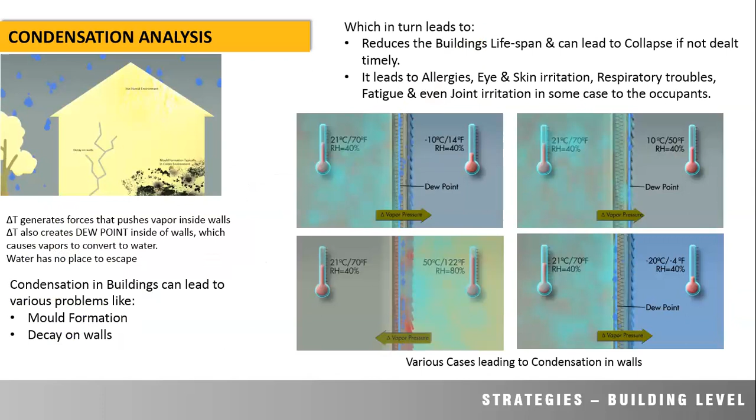Then you can also do a condensation analysis. Many times you might have seen that there is a problem where there is a condensation issue in the building, which leads to mold formation and decay on walls. So we can also do the condensation analysis, as shown here: interstitial condensation analysis, condensation interfaces, surface condensation. This analysis and report will give you where the moisture is getting trapped, and what are the critical areas which need to be designed or redesigned to avoid these kind of condensation issues.

So moving ahead, coming to the wall materials, for this session I have tried to put together a few things to tell you more about the materials and strategies. If you talk about the wall, the wall assembly can be comprised of masonry, insulated panels, solar passive facade, or phase change materials. So I've put together a glimpse of the materials available, so that you can understand how to brainstorm around picking up the right material for the wall assembly.

If you see masonry, just quoting a few examples, you can use AAC blocks, thermally insulated bricks, hollow blocks, and cavity walls. Then for insulated panels, you can actually add insulation to the wall assembly. If there is a cavity wall, that also acts as insulation, creating a buffer.

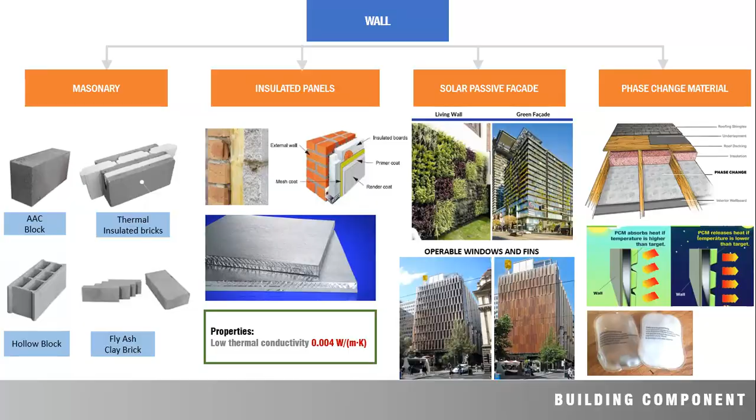It specifies what should be the U factor for the overall assembly, what should be the R value of the insulation material alone, then the overall U factor of the assembly, and the R value of the insulation alone.

So we need to try and analyze all the aspects independently - the specification of each and every layer of materials used in the wall assembly - and then find out whether it is compliant, because these codes have been developed by analyzing different typologies of buildings, running thousands and lakhs of dynamic simulations, and deriving these values for different climatic zones. As you might be aware, the Bureau of Energy Efficiency has classified 5 different climatic zones, and these values are categorized for different typologies of building under different climatic zones.

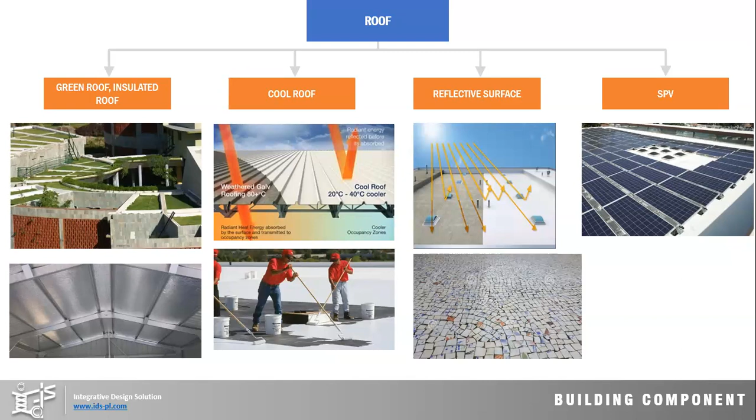And that needs to comply with the requirements specified in the code. So then you need to check if it is complying with the code well enough. And if it is not complying with the code, then you need to make some changes. You need to add more insulation, or you need to add a different kind of material in the roof. You need to add the surface layer resistance. So all these kinds of permutations and combinations you can do once you are able to quantify the result, and once you are able to identify whether the roof is performing better or not.

Similarly, for windows, we have WWR. So it's not like we are making the entire building with big glass windows and all. We have to have optimization. We have to have a right WWR ratio. We have to have a right skylight to roof ratio, so that we do not have major heat coming in. Because when we say sunlight is coming inside the building, it is not just the light coming inside, it is the light plus the heat coming inside the building. So there have to be different ways to stop the heat coming inside from the window. So it has to have the right proportion of skylight or window, so that we can cut down that heat.

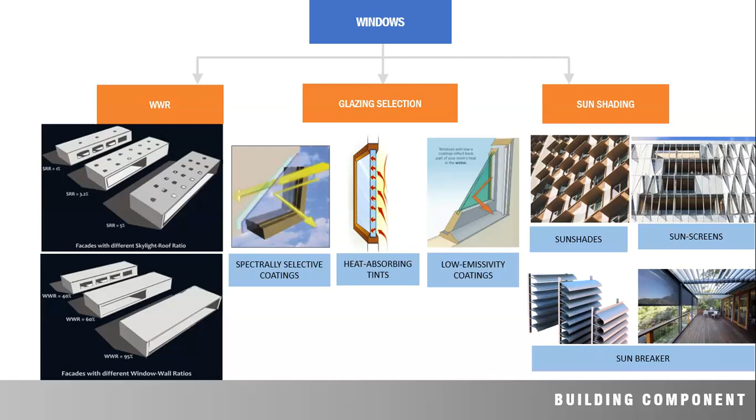So again, when we go and pick the glass, the specification that we need to see is the U factor and the solar heat gain coefficient of the glass. So we need to understand whether these two things comply with the code requirements or not.

Then coming to the mutual shading, as we have discussed earlier already. So this is just one of the examples. It's not like we are creating something out of the box. It is a simple design, but if you see, just with some beautiful architectural intervention, we are creating nice shadow patterns as well. And it is also helping in improving the performance of the building.

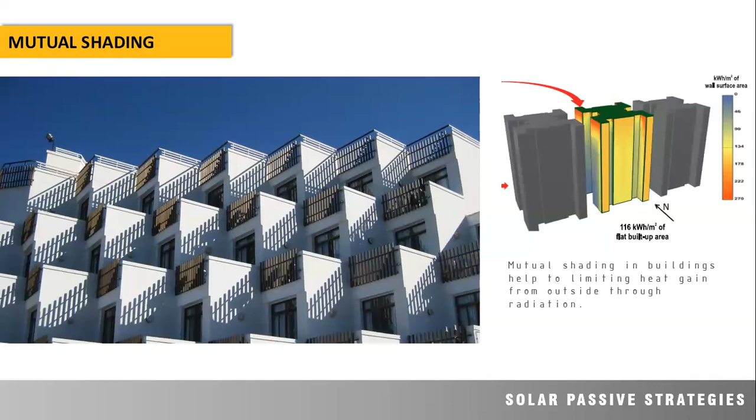Similarly, Gabion walls. So we all know the time lag of stone and the thermal mass property of stone; it allows us to use Trombe walls and Gabion walls. They can be beautifully used as solar passive strategies, and they can equally give you the right aesthetic requirements of your building design.

Then the creation of buffer zones. So buffer zones play a very good role when you're designing a building. So if your building is designed in a way where the longer facade of the building is exposed towards the critical angle, and when I say critical angle, I mean the direction from where you're getting the maximum sun hours, then you can always try and create buffer zones. You can try and put some screens on it, so that the buffer zones will not directly allow heat gain inside the livable spaces.

So you can have these kinds of solar passive strategies while designing the building. Then light shelves. Light shelf again, like we all know that we have to design a window in a way where you can have the maximum utilization of daylight. But I'm sure, I mean, how many of you have actually given consideration to it? We simply design a window with overhang, that's it.

But you can actually enhance your daylighting performance by adding these solar passive strategies like light shelves, providing skylights, providing nice glasses, different combinations of glasses, different sizes of glasses, so that you can get an entire area which can be naturally lit and less dependent on the mechanical or, let's say, the artificial lighting system.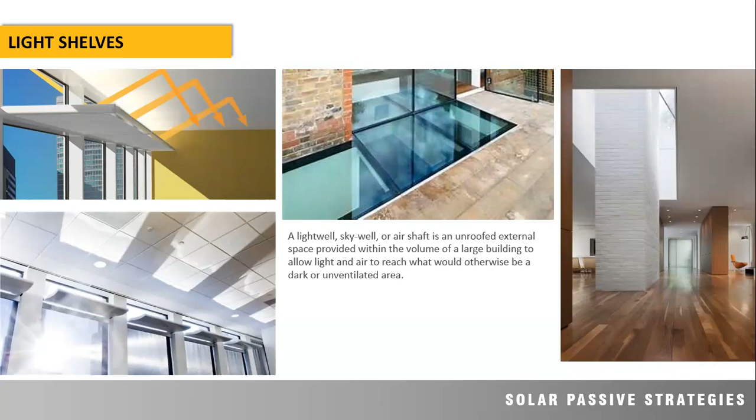Similarly, when I said clean energy, clean energy or the renewable energy sources, we can always look for earth air tunnel, and we can also look for different solar passive strategies which can improve the thermal comfort requirement of the building. And it's not just the earth air tunnel, because actually it requires a lot of space. And in a few of my projects, I have also seen that sometimes it is not even possible. But let's try and explore.

It is not just one example. There are so many different examples that we can try and explore to understand that there are different strategies that can be used to make the building thermally comfortable, and to reduce the requirement and reduce the dependency on mechanical systems. And then finishes and indoor air quality, which is very important. Most of the time we forget that these things are important to also handpick.

So with indoor air quality and finishes, you can actually create a nice, breathable air environment, so that there is no fungal impact, there's no health impact in the building environment. You can also always select a breathable plaster. Like here are a few of the cases and glimpses of clay based finishes for improved indoor air quality.

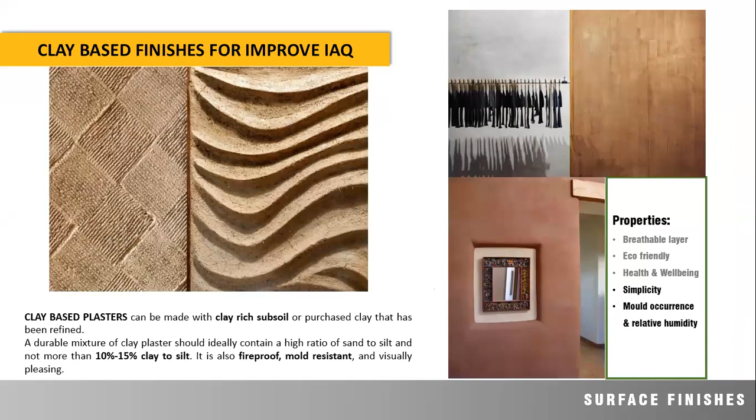If you see all these tiles, those are tiles and textures that we can have with clay based finishes, and they are cost effective also, they are responding to the climate and culture also, and they are also improving the air quality inside the building.

Then again, lime plaster. Lime plaster has been used in all our traditional and vernacular buildings, but somehow we have stopped using it. Maybe because we are moving towards the contemporary style of construction, choosing materials and all.

But if you see, we can always go back and look for some innovative material where we can have lime plaster based, we have lime based internal plasters to improve the indoor air quality and equally enhance the aesthetics of the building interiors. Then floor finishes and all.

So this is one of the examples I tried to put in, where this particular material is 100% recyclable, and it has a major component of rice husk. So 50% is rice husk, and then there are different polymers. So we can always look for innovative materials.

We can always do some research and understand what are the different kinds of materials available, which are sustainable in nature, eco-friendly in nature, and also recyclable, creating less negative impact on the environment. So I just wanted to show you how the material palette could look if you are selecting the material for your building design and for the energy efficiency requirement of the building.

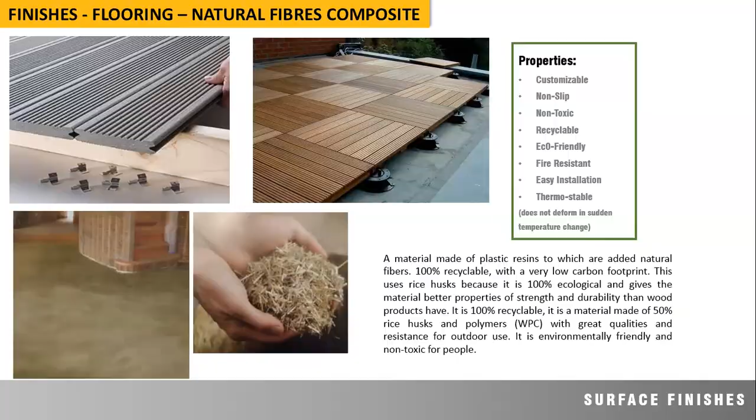So the next topic is simulation softwares and tools. So this is very important. I mean, most of us would always, like, even when I was entering into this industry, I also wanted to know what are the different tools that I can learn, what are the different softwares that I can learn, what actually these softwares can do and all. So these are the simulation softwares and tools that we can explore.

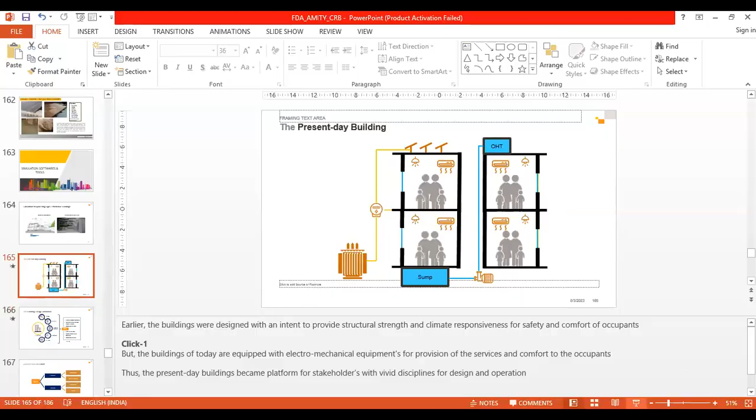Hello, ma'am, is everything okay? We cannot hear your voice, ma'am. Participants, I think ma'am has some network issue. Let us wait for a moment. Yeah, Nishta, just 1 second. I think my other system has got disconnected. I'll just quickly connect it. Yeah, sure, ma'am, no problem. Participants, can you all send a reaction for this session until ma'am is back? If you liked the session taken by ma'am, you can just react with a thumbs up. Nishta, can you see my screen? Yes, ma'am, it's visible. Sorry about that. No problem, ma'am. Okay, so just let me know till which slide it was audible. Okay, can I start with this slide?

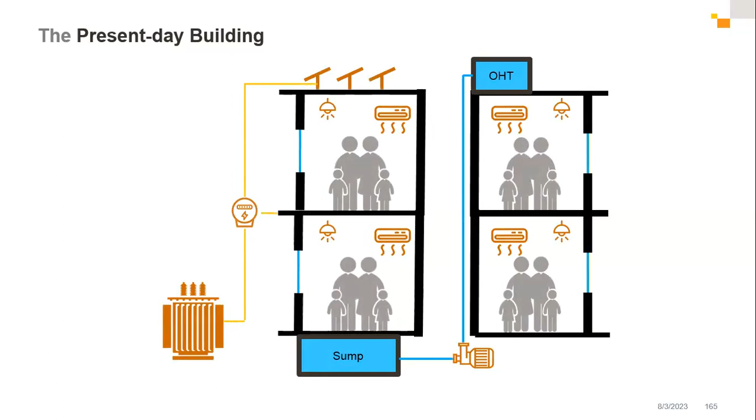Yes, ma'am. Okay, great. So what I was telling is that earlier the building used to be designed with the intent of providing structural strength and climate responsiveness for safety and comfort of the occupants. But now the buildings that we design today have electromechanical equipment for provision of the services and comfort of the occupant. And thus present day buildings became a platform for stakeholders with vivid disciplines for design and operations.

So earlier when we said, okay, ghar banana hai ya building banani hai, then okay, let's just get the contractor and the architects involved. But these days it has become a comprehensive project. Every stakeholder has to be aligned with the design, like architects, MEP consultants. I keep repeating this to make it concrete in our mind that it is not a solo act now. All the stakeholders have to be aligned at the right time, at the right stage.

There's no right design or a wrong design thing. But if all the stakeholders are involved at the right stage, you will not face any issues where you get a shock: Arey, ye kya hua? This is not what I was expecting out of my design. No, this is not the case. If we have all the people at the right stage, we can all brainstorm together, share a design, and integrate all the services together at the right stage.

So when we do building energy simulation, the building has different components. A building could be considered high performing when longer durations of comfortable conditions are provided with less or no use of energy sources. The parameters related to climate, built form, envelope insulation levels, occupant behavior, and efficiency of the appliances and equipment play a pivotal role in providing comfortable conditions in built spaces.

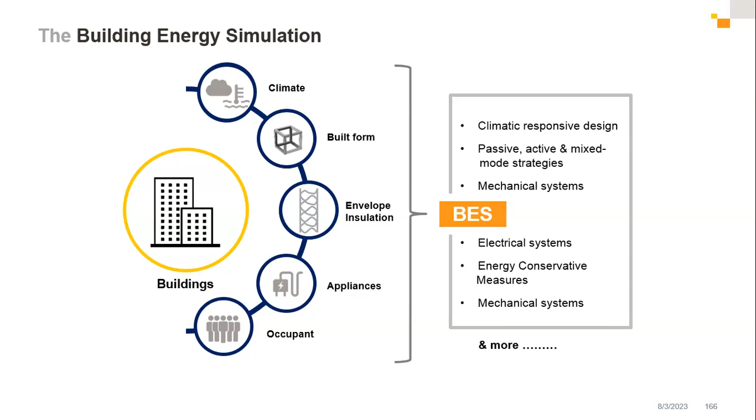With the advancements in today's world, we have multiple options for built form, envelope and appliances to choose from. Thus the decision making process becomes critical for any building design stakeholders to choose the effective combination, and without assessment it is very much restricted. If you are not able to assess what the right combination is, it is very difficult to understand it. Therefore these computer based solutions give us the options to select the right combination for the building.

When we do building energy simulation, we consider two things: the thermal aspect and the lighting aspect. For lighting, we consider daylighting and electrical lighting. For thermal analysis, we select the building components and different systems. Once you have all these things in place, you will be able to select the right combination for any particular building design.

So you might have heard a lot that with all these advancements in programming and technologies, we are improving our efforts in terms of understanding and analyzing the building performance of any construction style or typology of the building.

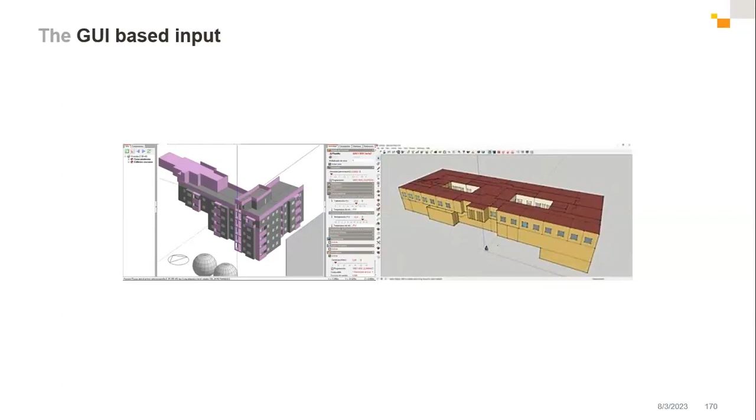Then with GUI plus VPI integrated input, we have this option. There's a software you might have learned. Just write yes or no in the chat. Have you heard of Rhino and Grasshopper software? Yes, good. So basically, in Rhino and Grasshopper, we have different plugins where you can do all these kinds of analysis and assessment.

So as I mentioned earlier, we have already been practicing these analyses and assessments. It's all about taking a leap toward assessing the performance aspects of the building. Earlier, we used Rhinoceros just to design the building and get the design output. But using different software plugins, you will be able to understand how it is performing. And these platforms allow not just energy simulation, but also environmental simulation, which is interlinked to building energy performance.

For instance, sun path and wind analysis for deducing fenestration position and design in a building that alter the comfort conditions, or energy use in natural ventilation or mixed mode ventilation. All these kinds of analysis we can do through this kind of software.

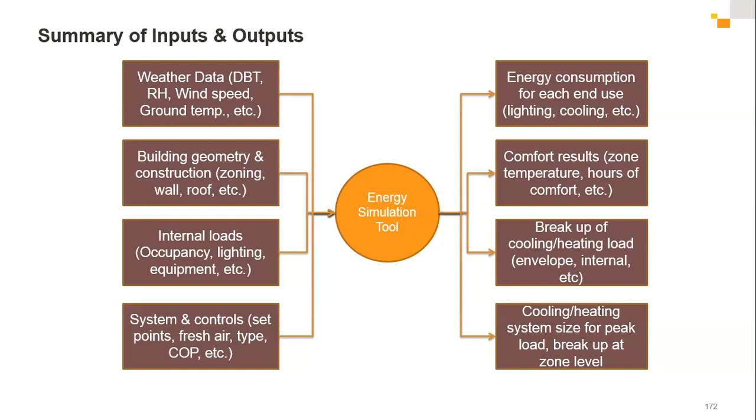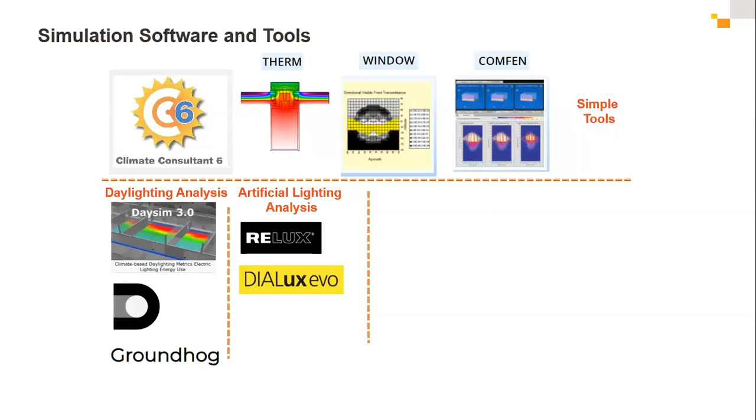Based on experience sharing, there are different simple tools with which you can do climate analysis, like Climate Consultant, Therm, Window, and Comfen. Then you have DaySim and Groundhog for daylight analysis, Relux, DIALux evo for artificial lighting analysis, and RETScreen for renewable energy system analysis.

You have ENVI-met for urban environmental analysis, and for optimization analysis you have GenOpt. For CFD analysis, which we do for wind flow and such, you can use Fluent or STAR-CCM+. These are the different software that you can use.

For building performance tools, just for thermal performance analysis, you can use eQUEST, TRNSYS, or IDA ICE. For thermal performance plus lighting analysis, you can use the Autodesk tool Ecotect or OpenStudio — though Ecotect isn't much used today in the industry, OpenStudio still is. Then for thermal performance plus lighting plus CFD analysis, you can use Design Builder or IES software. These are the integrated softwares.

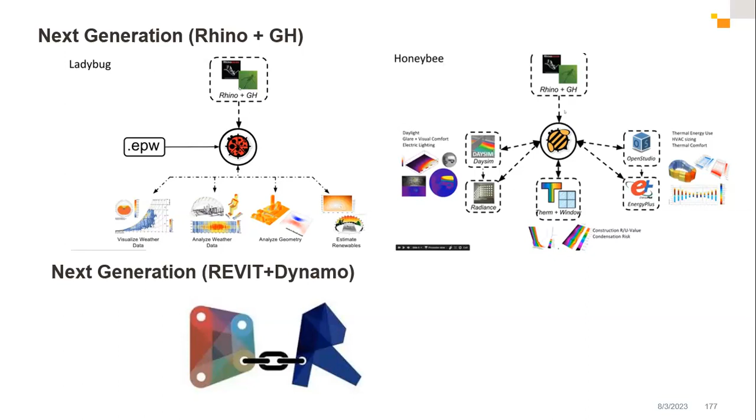Coming to the next generation software, as I've mentioned, you can use Rhino Grasshopper with the Ladybug and Honeybee plugin. You can do different kinds of analysis for visualizing and analyzing weather data, analyzing the geometry of the site, and estimating renewables. It's so integrated that you can do daylighting, thermal performance, and solar radiation analysis all together in one software. So this is the canvas of what kind of analysis you can do with all these simulation software.

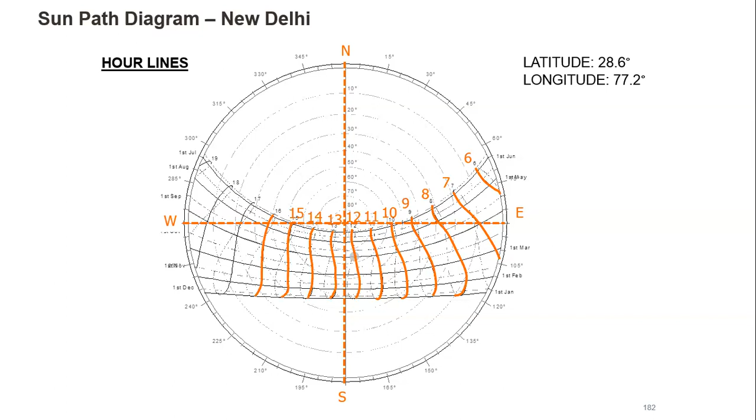Basically, in the sun path diagram, these lines are the day lines which show the summer solstice, 21st June. This dotted line in the middle shows the equinox, and the 21st December line, the third dotted line, shows the winter solstice. Then these are the hour lines, showing at which hour we are reading the sun path — this sun path is for New Delhi, for reference. These circular lines are the altitude lines, telling you at which altitude the sun is. The Tropic of Cancer runs at 23.43 degrees north.

So if you see, at Amritsar your sun path diagram will look like this, slightly shifted — are you able to see my screen? Because it seems like my screen is stuck.

So your sun path diagram with latitude 31.4 degrees north will look like this. Then for Bhopal, which is very near the central line, with latitude 23.3 degrees north, it will slightly shift towards the north. And for Chennai, the sun path diagram will look like this.

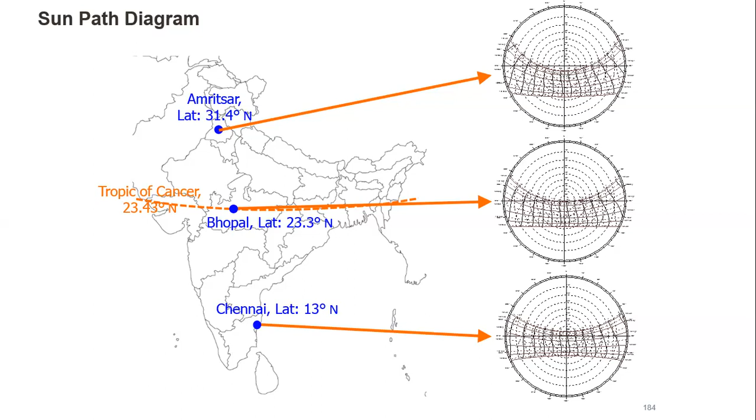So with this, I'm going to end my presentation, and I hope it has addressed your queries on how to integrate your climatology study with applied climatology.